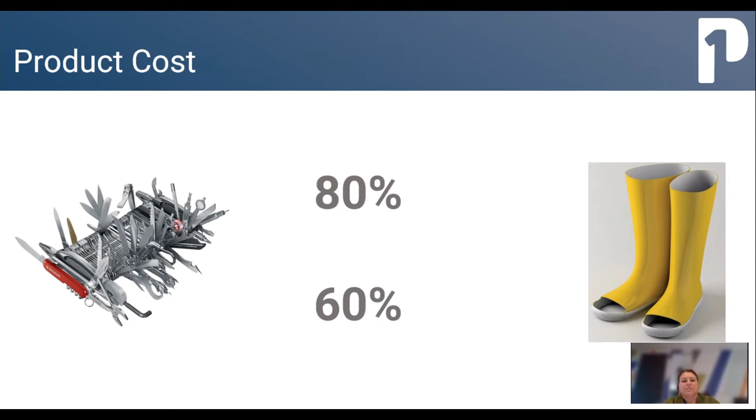Product design can determine up to 80% of the final cost of a product, with concept design determining up to 60% of that cost. Over-design or even under-design can lead to bad brand reputation, bad customer experience, and it will either drive sales down or it will drive costs up.

Companies aspire to grow. Whether you want to grow from increasing your revenue on new products or increasing your profitability on existing lines of products, the leadership of a company will come up with a high-level strategy that the organization should embark on to meet the company objectives.

From that strategy, various initiatives are passed down to functional heads, or these functional heads are asked to come up with initiatives to meet the company objectives.

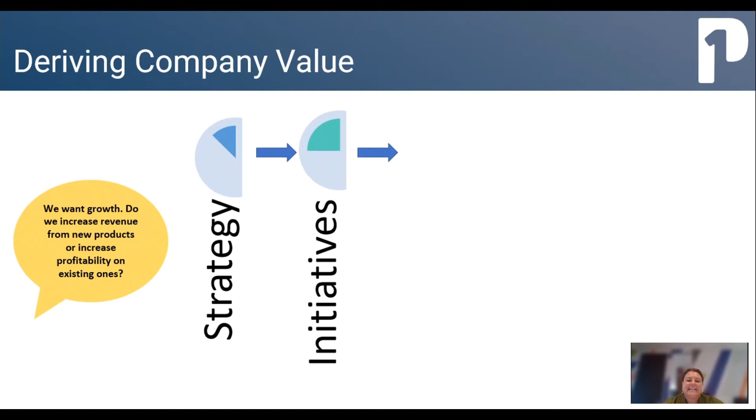Once we understand the initiatives that we'll be embarking on as a company, we really need to understand the set of activities that ultimately lead into the company's processes that will lend itself to meeting the company objectives overall. Once we understand these processes and activities, we need to then understand what capabilities in the organization that the company needs to employ, either through technology or its skills and its people.

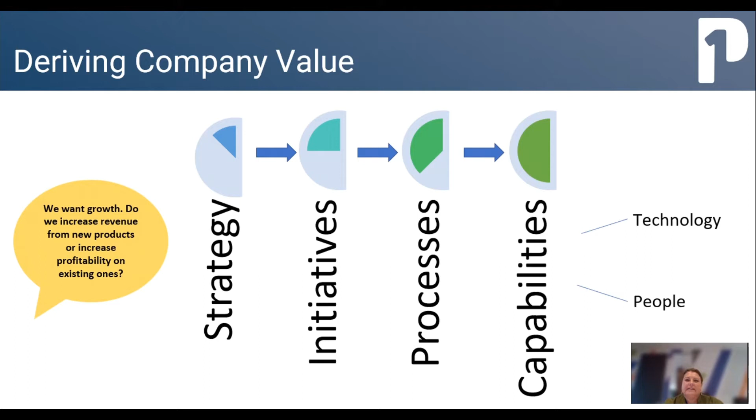Whilst productONE is certainly in a position to speak to you about strategy, initiatives, and optimizing various processes, today's webinar is laser focused on the capability portion derived from technology. Concept design is an important part of the design process.

It's very important in this part of the design phase that you are able to quickly and efficiently interrogate a number of design approaches and see the impact of those approaches so you can make certain decisions and have choices. FEA analysis and fluid analysis is an expensive exercise. It's also a pretty scarce skill.

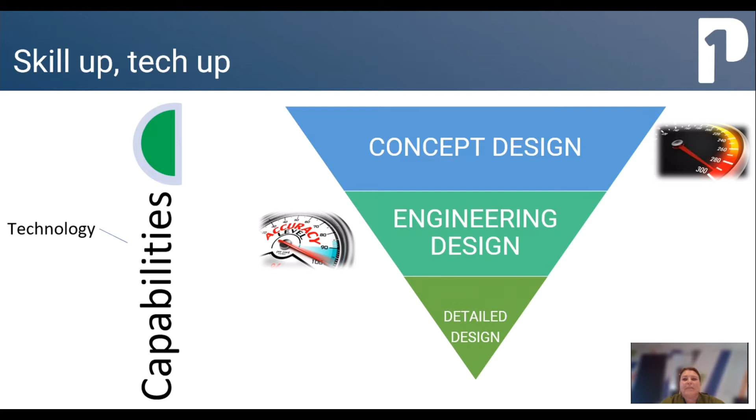Thank you, Teshi. I really like that introduction, but I hope it doesn't give me a big head. So today, as Teshi mentioned, we are going to be looking at PTC's product, Creo Simulation Live. Let's get into it.

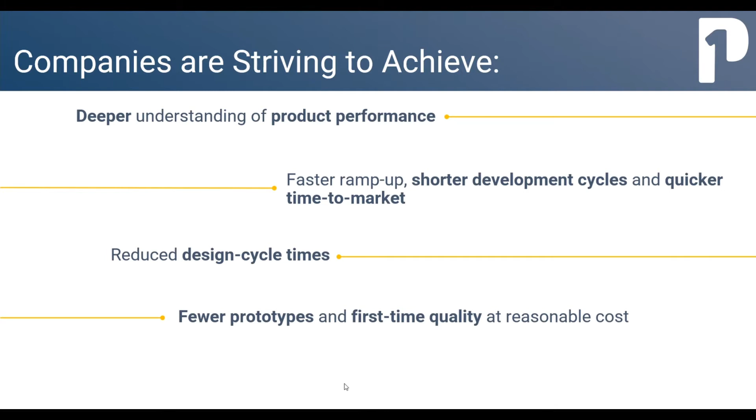So as Teshi mentioned, companies are seeking to grow, and what they've realized is that when it comes to design, they need to achieve one or all of the following goals. They need to better understand how their products perform, reduce development cycles, improve time to market, reduce design cycle time, create fewer prototypes, and increase product quality and performance, thus reducing warranty and repair costs.

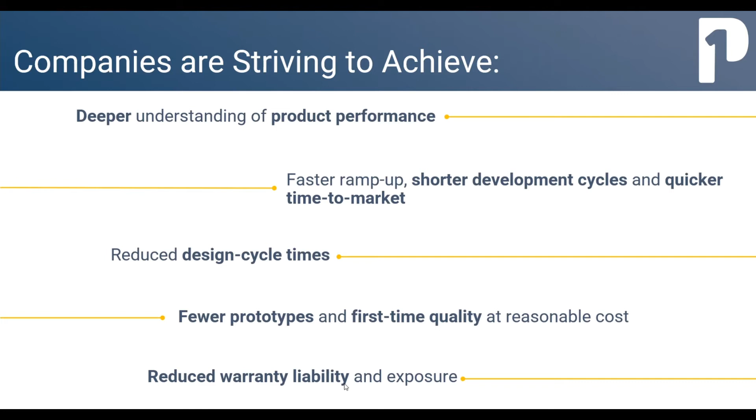So PTC saw this and embarked on a journey to assist PTC's customers in achieving all of these goals. Before we get into the solution that PTC found, let's look at where these things can be achieved, which is the design process.

The typical design process starts off with a concept or multiple concepts, and then one concept is chosen and moved on to the detailed design. From the detailed design, in order to validate the design itself, a prototype has to be created. If any errors are found from the prototype, it either means going back to the drawing board, which is the concept phase, or if it's an error that can be fixed in the detailed design, it can be fixed there.

And once that error is fixed, it goes back to the prototype. So what happens here is you cannot go to manufacturing until you have a working prototype, and sometimes you might have to create multiple prototypes in order to get one working prototype that can be manufactured and put out to the market as a product.

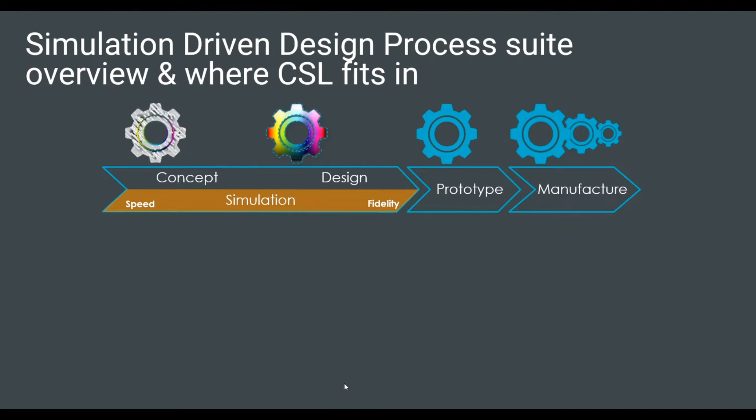What PTC has seen is that the use of simulation is very important in reducing the number of prototypes that are created. I know some of you have worked with or seen high fidelity simulation products such as Creo Simulate, Creo Ansys Simulation, and Creo Flow Analysis.

But high fidelity tools such as these, or as we call them, traditional analysis tools, are usually used at the end of the design process, once the detailed design has been created. The reason for this is because people see it as too time consuming to use in the early stages of the design process, since the design itself from concept to detailed design keeps on changing.

So this leads to designers and engineers relying solely on their experience, and the decision itself is backed by intelligent guesses and sometimes manual calculations.

Since the simulation itself is done at the end of the design process, or at a later stage within the design process, if any errors are found it would require rework, and in other cases a whole lot of rework. You might have to go back to the concept and recreate a new concept, which increases the design cycle itself.

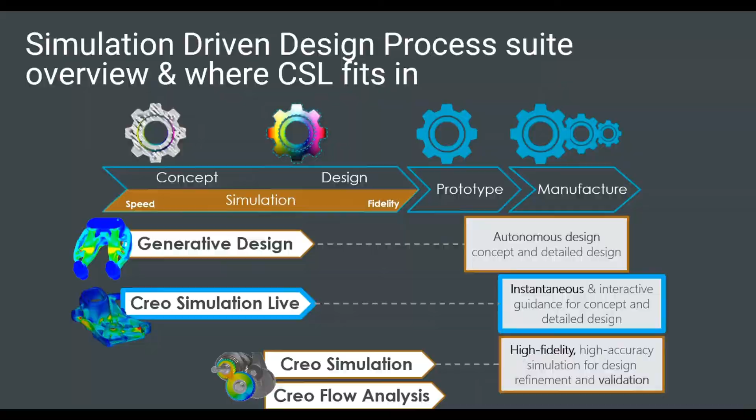Okay, so in today's series we're going to be looking at Creo Simulation Live. So what is Creo Simulation Live? It is the integration of the ANSYS Discovery Simulation Engine into Creo to provide real-time analysis for simulation.

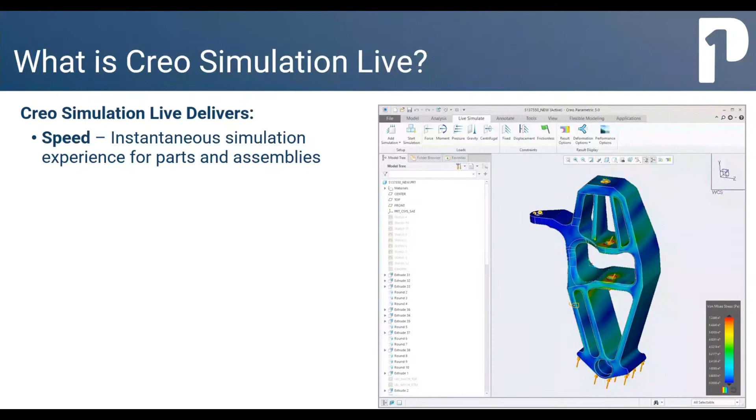So what does that mean for the designer? This basically means that you can rapidly define and perform simulations on parts and assemblies, because you are working in the same Creo interface, and there is no need to export parts or create mesh. You can run your first simulation within minutes.

So it allows you to make changes to the design while the simulation itself is running. As you are making these changes to the design, you can see the result of the simulation dynamically update. And it is powered by ANSYS, who have been a leader in simulation for the past half century.

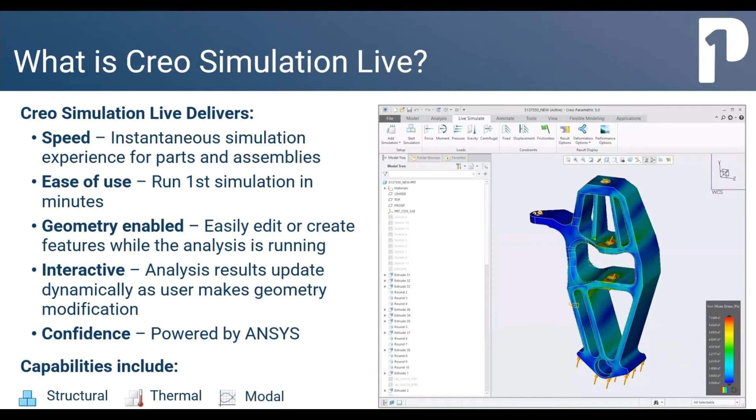So let us look at the capability. You can perform a static structural, a thermal, a vibration, and a fluid simulation inside of Creo Simulation Live. Okay, so let me get into the demonstration to show you how Creo Simulation Live works.

So since I am a designer, I have been given a bit of guidance by the analyst on what the maximum stress, or the maximum von Mises, should be. For this particular demonstration, I will start with this orange beam here, which is the main beam.

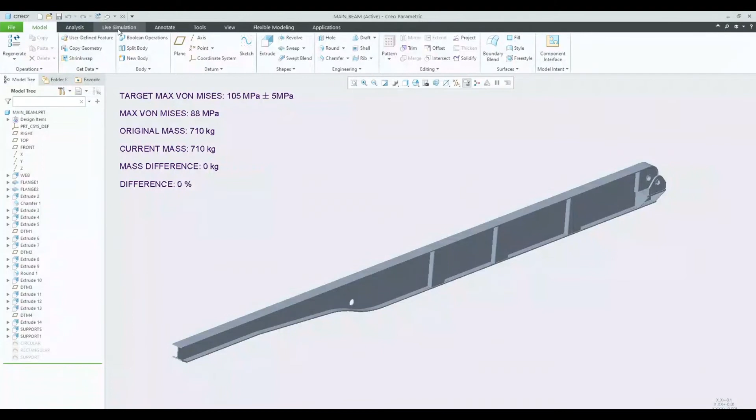So what has been added is just an additional tab to the interface, called Live Simulation. As soon as I jump into Live Simulation, if you have any loads or constraints, it does show them. I've been advised by the analyst on the loads and constraints to use, and I've added them to the model.

In Creo Simulation, you can run a structure simulation study, you can run a thermal, you can run a modal, you can also run a fluid simulation study. All of those things you can run within Creo. But for this demo, what I'm going to be looking at is the structural simulation. So you will see as soon as I start the simulation, it'll start running.

But before we get to that, I just want to show you that in Creo Simulation Live, you have an option of getting results quickly, but less accurate, or getting more accurate results but at a slower rate compared to the speed side. So for this simulation, I'll just leave it closer to the speed, but then a bit more accurate.

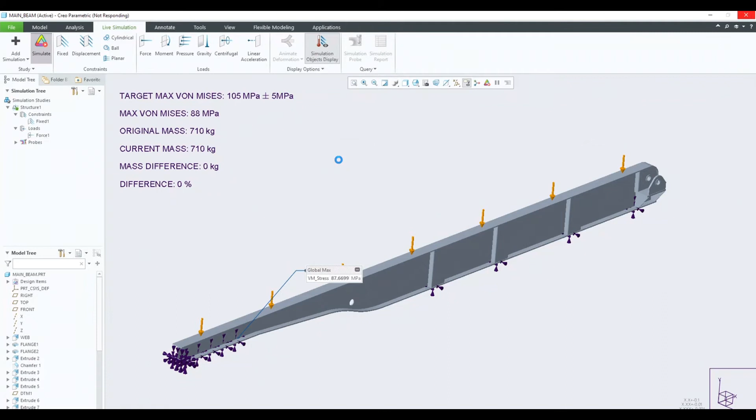To start Creo Simulation Live is as easy as one click, and what's happening in the background is Creo is running Creo Simulation Live, and you are able to see the results instantaneously. It also shows me in colors where most of my stress is and where the least of my stress is.

So I can look at the legend, and the lighter blue tells me that's where the least stress is. And if you look at the red there, that's where the most stress is.

But what I'd like to take note of is these here. I have a target stress that I have to work to, and the current stress that I am running in the simulation that's currently showing me. You can see on the legend there, it's the same as this one.

What's important, and the instruction that I've been given, is to reduce the mass. So we can see what the original mass currently is, and what the current mass is, and we can also see what the mass difference is in kilograms and in percentage, so that we know if we are on the right track or not.

Looking at the part that I'm working on at the moment, I can tell from the stress that we have over-designed it. This happens a lot when people are just guessing and not really informed using such tools. So what I'm going to do is make a change and see what effect it has.

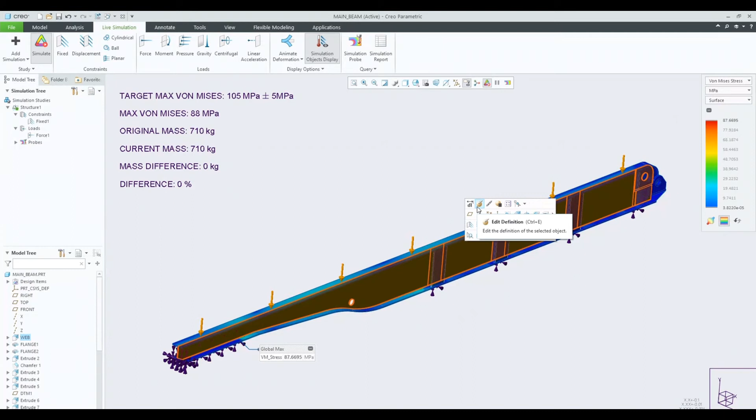I'm going to see the effect on the von Mises stress and also on the current mass.

So the first change that I'd like to make is to make the web of the beam a bit thinner. Let's just take it down to 10 mils. The original was 12. Let's see what happens.

You'll see that Creo Simulation Live is running, and it's giving me those results instantaneously. So I'm able to see that, yes, by making this change, the beam now weighs less, 54 kilograms less now.

I can also see that the von Mises stress has gone up a bit. But I'm still not close to the target von Mises, or the von Mises I've been told not to go above. That means I can go further and make another change to the thickness of the web and see what that change does.

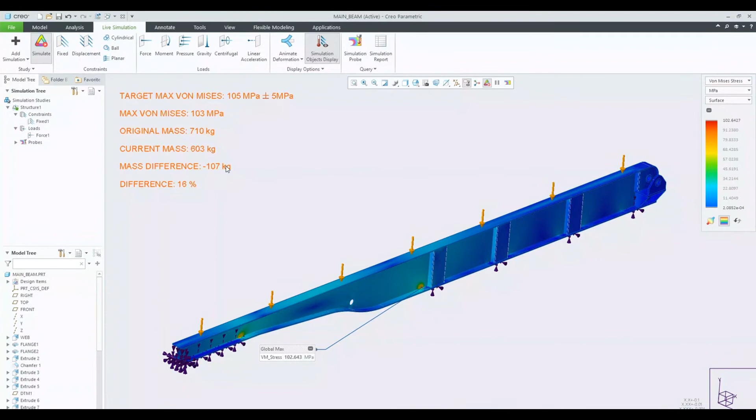So I can see that with the change I just did, the mass now is way lower, the mass I'm saving is way higher now. It's 107 kilograms. This particular beam is 107 kilograms lighter, which means that goes into the payload itself.

But then I'd like to make more changes to this beam. When I look at it here, the von Mises stress is around 103 megapascals, and I'm afraid that the changes I might make might compromise the strength of the beam.

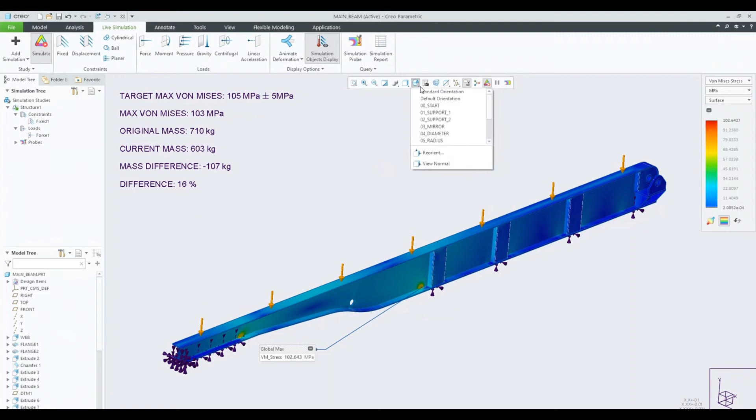So what I'd like to do first, before I continue with the changes I want to make, is to strengthen the beam a bit. So first I'll just have a look at my beam, and then have a look at where the most stress is acting.

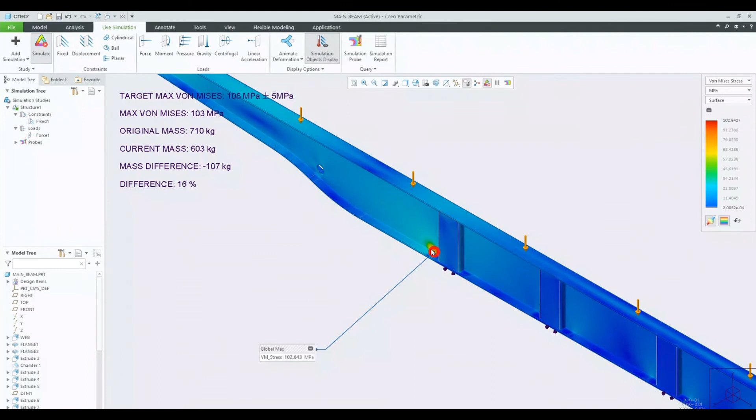The blue portion tells me that's the least stress, the low one. The red is telling me that's where my most stress currently is. So what I'd like to do is reduce the stress there by making this support channel a bit wider.

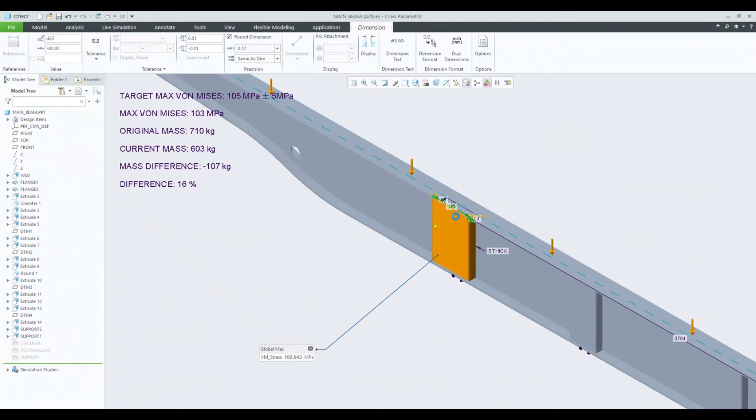If I was making such changes without a tool like Creo Simulation Live or high fidelity tools, I wouldn't be able to see what effect that change has. By just making that change, you can see that the maximum stress has moved from that side there to that side over there.

That tells me that the change that I made has made a difference. It has made this particular part stronger.

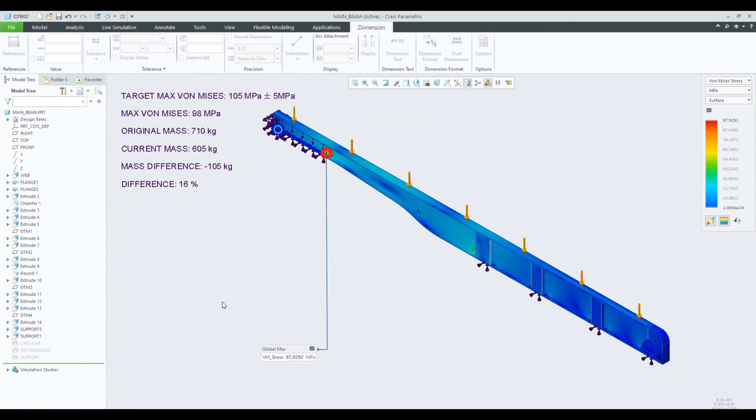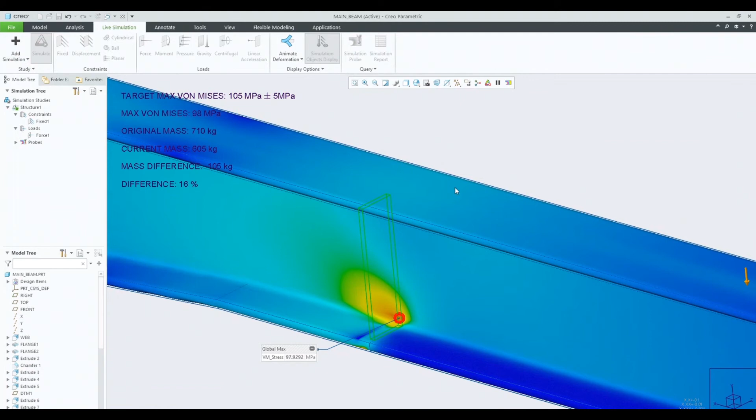So what I'd also like to do is continue further strengthening this beam before I make any further mass reductions. What I'd like to do now is add another support onto this part by creating geometry there. But then I also have to take into consideration that as I add, yes, I might be strengthening the beam, but then I'm going back now.

My mass difference is becoming lower because I'm adding more weight onto the part. And then as I can see here, the stress has reduced slightly. The support that I have here didn't make that much of a difference.

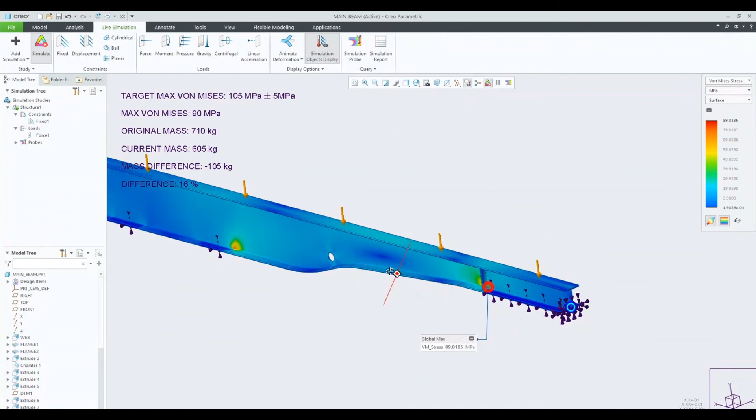So this I can see because I am informed. And then what I could do is go on to where that stress is acting, which is at that portion there. But then I can see that it's not on the side that I created the support, but it's on the other side, which is here. So I can create another support on that side.

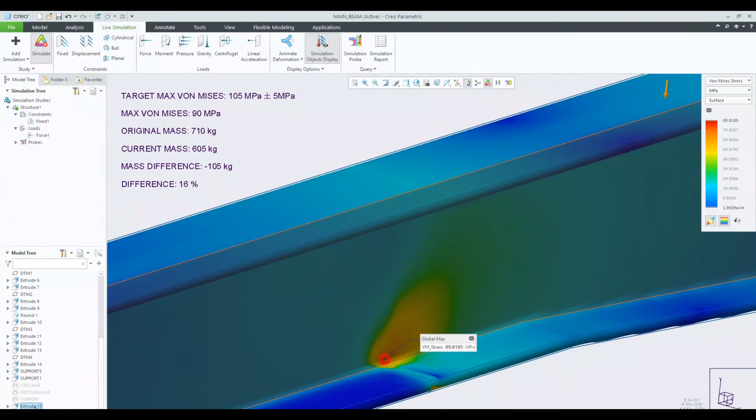Okay, and then see what the stress difference is if I create that support there.

So as you can see, my mass difference is much lower than what I had when I didn't have all of these supports here. But then what I'm happy with is I've still lowered my von Mises stress, which means I've strengthened my part. And now I can make the changes that I need to make with confidence.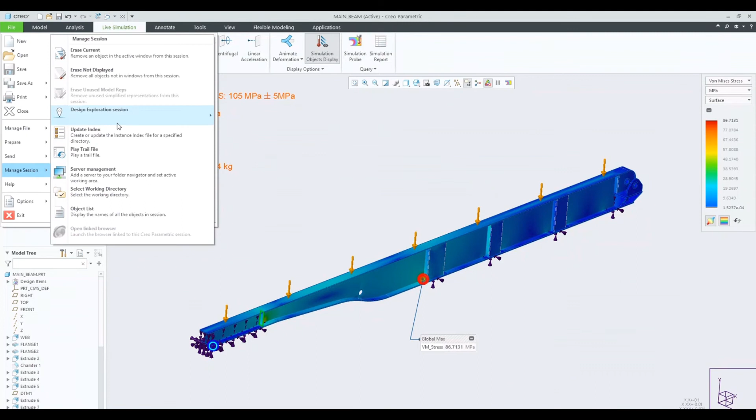Since you're doing all of this inside of Creo Parametric, you are able to leverage tools such as design exploration. What design exploration will allow me to do is create multiple concepts that I could share or review with either my manager, the analyst, or anyone else who's involved in this particular design.

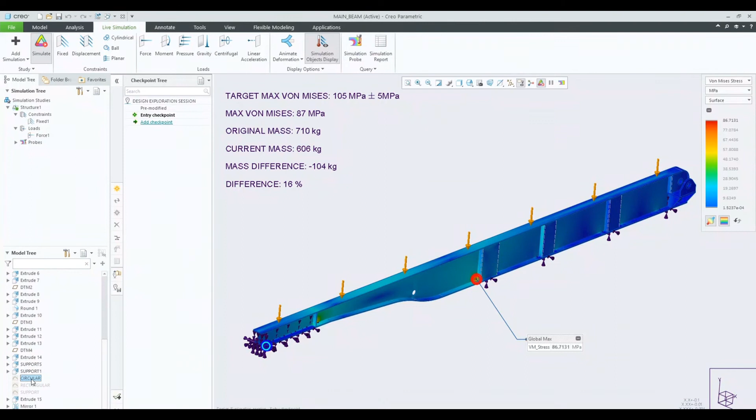So I'm happy with the strength of the beam at the moment. Now I want to reduce the mass. So what I can do is create cutouts, for instance, on this beam, such as those ones.

And then what I'd like you to take note of is what the mass difference is there, and also what the maximum von Mises is when I'm creating such concepts. If I were to do this without any guidance, it would be a bit difficult for me to get here without having an analyst run a simulation and then bring it back to me and tell me whether I'm still within the targeted von Mises or above that. If I am above, then I'd have to go back and make changes, which does increase the design cycle.

Now you'll be able to see that my von Mises is still under what is required there, and my mass has significantly decreased, which I'm happy with.

So I'll save this as a concept. So this I will save as a concept that I will share with everyone who's involved in this design.

So I can create another concept from this. What I want to do is just go back and, for instance, change the shape of the cutouts that I'm creating. Instead of having squares now, let's see instead of having circles — let's see what happens if I have squares. What happens to my maximum von Mises, and also what will happen to my mass there.

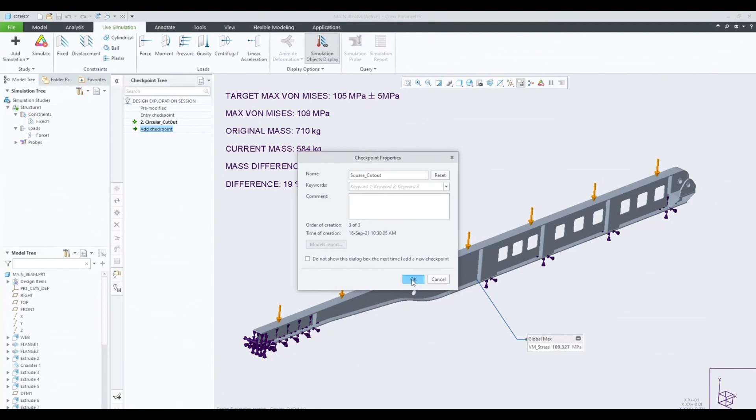Okay, so this has been created as another concept or checkpoint that I could go back to my manager and show him that I've managed to reduce this much weight by just creating cutouts such as this, and also reducing the thickness of the web.

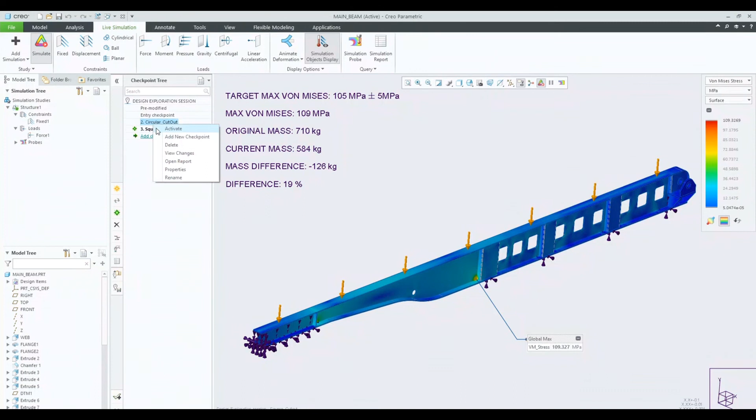Since I saw that this one has lower stress, but gives me a mass difference that's close to the squares, what I could do is go back to it and, for instance, maybe increase the diameter of the circles.

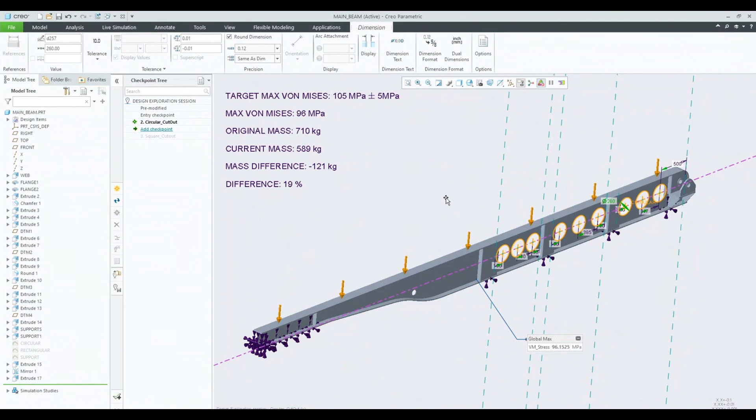Once I do that, I can save this as a checkpoint as well. So let's just call this bigger diameter checkpoint, so I know that this is the checkpoint with the bigger diameter. What we need to take note of is that this saves more mass compared to the other two design concepts I have.

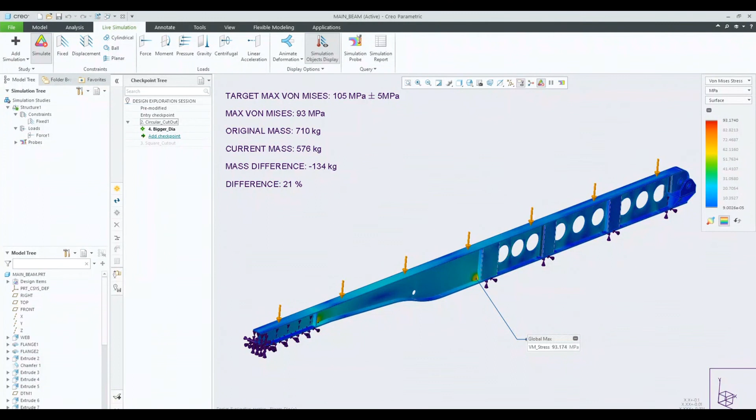Let us just go back to the slides and recap on what we have looked at now. So what we have achieved today is that I was able to reduce the mass as per mandate from my manager, and I was also able to keep the strength.

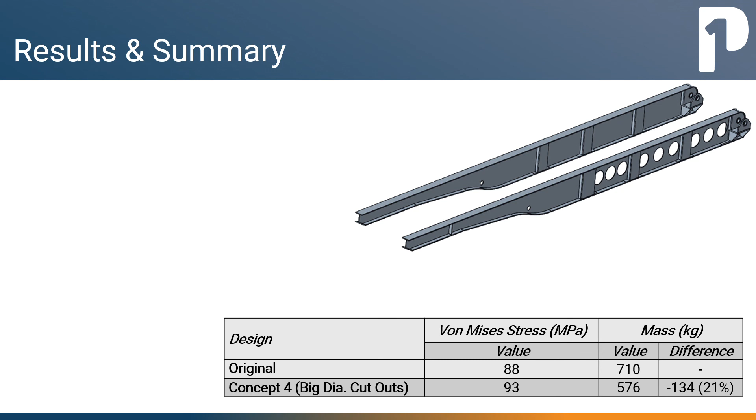I'm sorry that you can't see it at the moment, but that is 93 megapascals, and the mass difference here is 134, which means that I was able to save 134 kilograms.

What that basically means is that not only did the mass decrease, we were also able to decrease the cost of material by using a thinner plate for the web of the beam. So we went from a 12 millimeter plate to an 8 millimeter plate.

We were also able to increase the payload by 268 kilograms, because the main beam on the left-hand side is the same as the one on the right-hand side. So from 134 on one beam multiplied by two, we get that 268.

This value could also increase if we look at other parts on the chassis, or if the designer working on the bucket design also goes through a similar exercise.

What Creo Simulation Live gives us is the ability to develop high quality and high performing products that are easily differentiated in the market. For instance, with those cutouts that we have there, our customers or people out there would know that that was designed by our company.

We did all of this whilst we managed to maintain the integrity of the main beam, which means we are able to avoid costly recalls and repair costs.

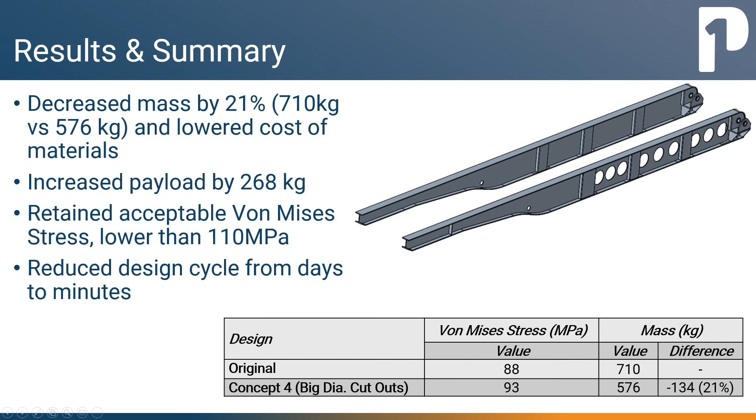But with a tool such as Creo Simulation Live, I can try out new concepts and see whether they meet the product requirements or not. If they do, then we can go on to the next stage of the design cycle. Okay, so that is me for today.